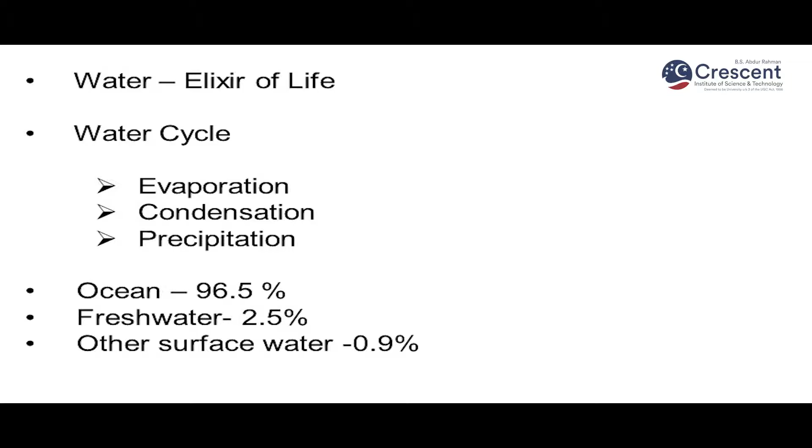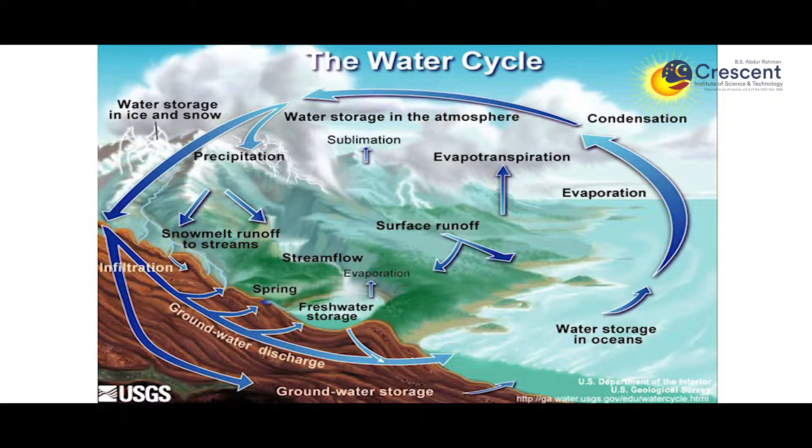Initially, the water from the different sources such as ocean, river and various other lakes and ponds evaporates depending upon the temperature, and further from the evaporation, when it reaches the atmosphere, it condenses and subsequently falls as rain in the form of precipitation. Now we can understand the different types of sources of water on the earth. 96.5% of water is available in the form of oceans, which we cannot directly depend upon as water supply, and we are only left with 3% of water which we are to deal with.

Now this 3% of water is available in the form of different sources. They can be broadly classified under surface sources and underground sources. To quote a few examples for surface sources, it can be a reservoir, river, lake, stream, springs, and the main underground water supply is through the wells.

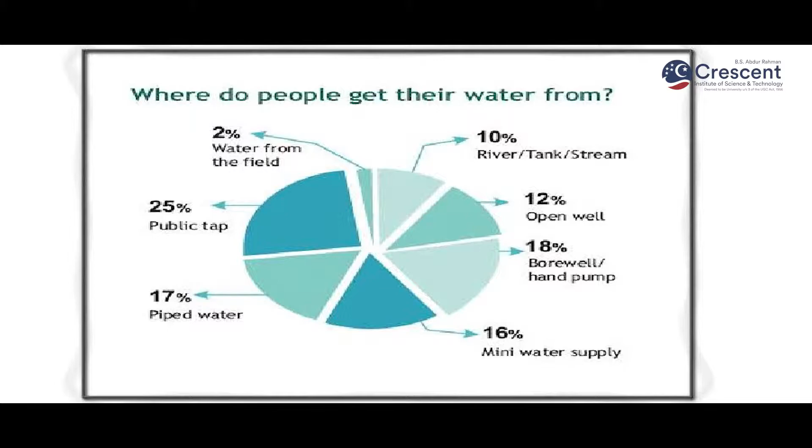Next is, where do people actually get water from? Though there might be a lot of sources, we mainly depend for our water supply on public taps, which is around 25%, followed by bore wells, then piped water, and subsequently open wells and rivers. So these are the different sources people actually get water from.

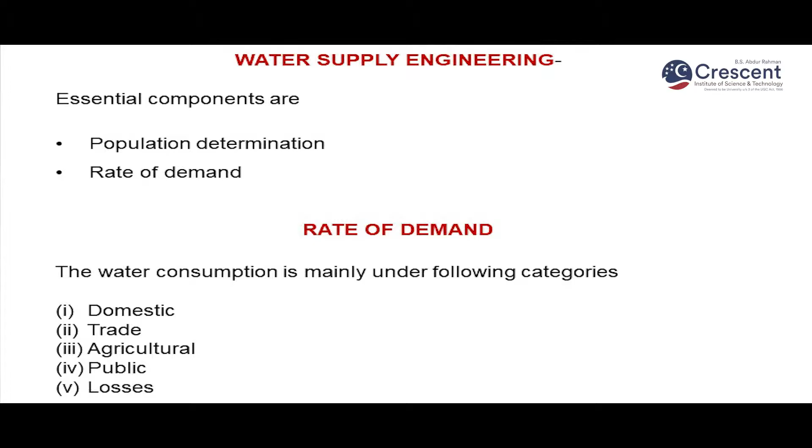Coming on to water supply engineering, the two main essential components involved in water supply engineering are population determination and rate of demand. It is essential to forecast the population correctly and also to have a clear knowledge of the various rates of demand. What is the water demand? Actually, an average consumption by a person varies from 3 to 6 liters per day.

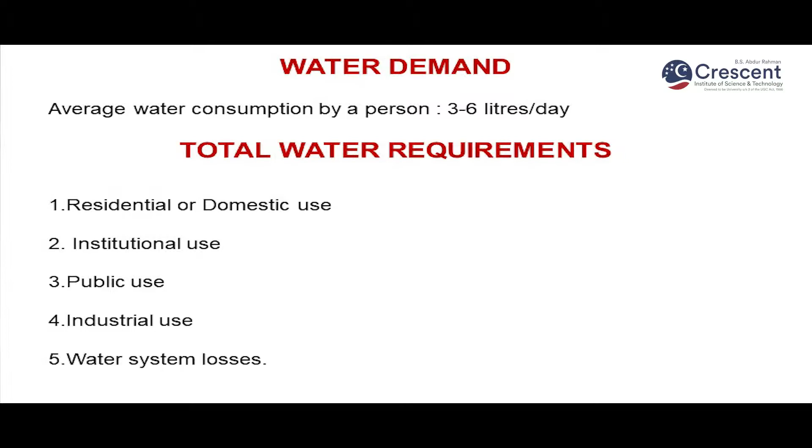The total water requirement which we demand in a day can be broadly classified under various categories. First one is residential or domestic use, then comes institutional use, third is public use, fourth is industrial usage, and fifth one is water system loss. Now let's go one by one. First, coming on to the requirement for residential or domestic use.

As per IS 1172/1957, it recommends a per capita consumption of 135 liters per day. So how does this 135 liters per day come in? It can be broadly divided into various activities such as bathing, which requires around 55 liters per head per day. Usually the amount of water is always quoted as liters per head per day.

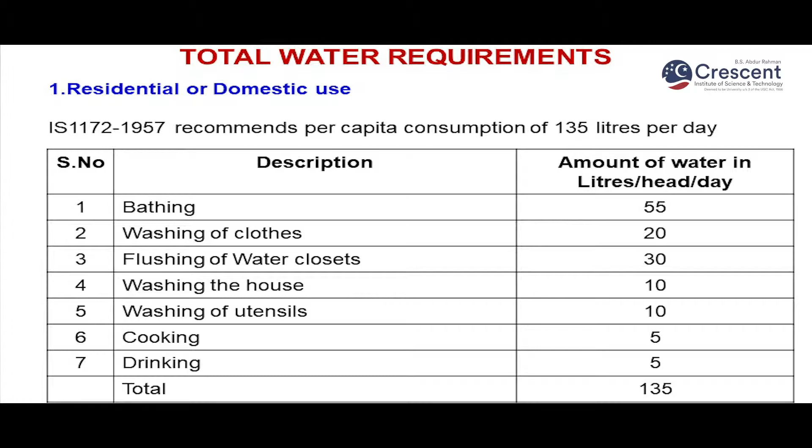Washing of clothes requires 20 liters, flushing of water closets requires 30, washing the house 10, washing of utensils 10 liters, cooking and drinking 5 liters per head per day. So it constitutes around 135 liters per day. Not only humans, even animals require water.

According to the Manual on Water Supply and Treatment prepared by the Ministry of Urban Development, New Delhi, it recommends the following rates. Consumption of water for domestic animals: for cow and buffalo, it varies from 40 to 60 liters per animal per day, for horse it is around 40 to 50, dog 8 to 12, followed by sheep and goat 5 to 10. So this is with respect to the animals.

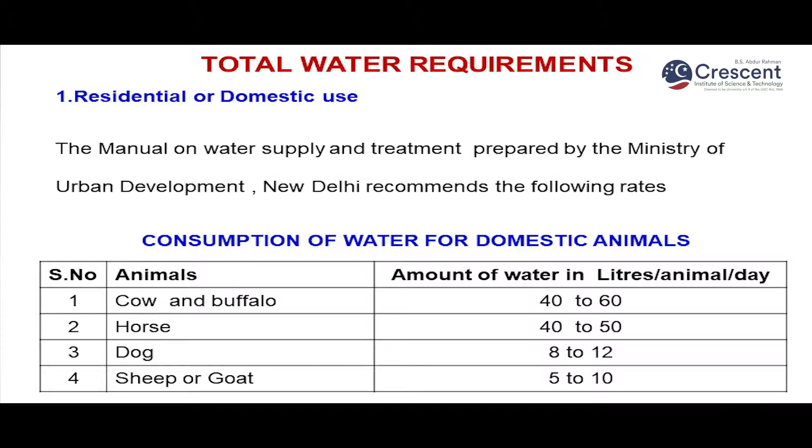Next demand is from institutional use. There are several institutions around us. It can be a hospital, a hotel, a hostel, nursing homes, or boarding schools. So various demands are being exerted by these institutions also.

If you look at the requirement, water requirement is again in liters per head per day. For hospitals, it is around 340 per bed if the number of beds does not exceed 100, and if the number of beds exceeds 100, it rises up to 450 per bed.

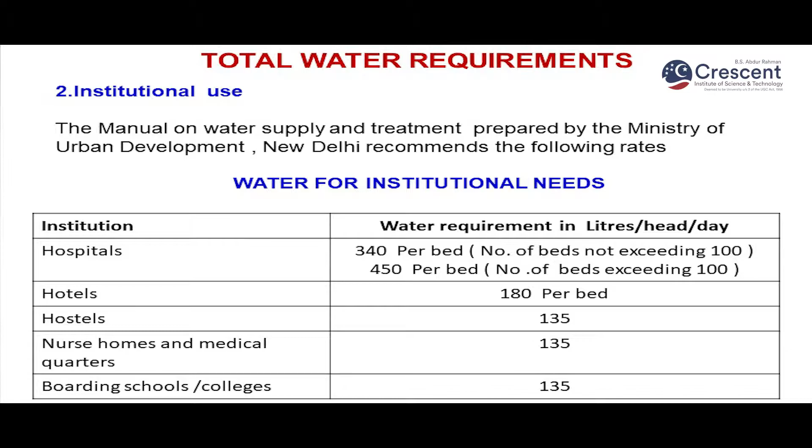Coming on to hotels, it is 180 per bed. Then followed by hostels, it is equivalent to that of the average demand, that is around 135 liters per day. And boarding schools, again 135 liters per day. And apart from that, we have restaurants, airports, seaports, junction stations and intermediate stations, terminal stations. These stations not only include the railways but also the airports and also the bus stations, that require around 70 liters per head per day.

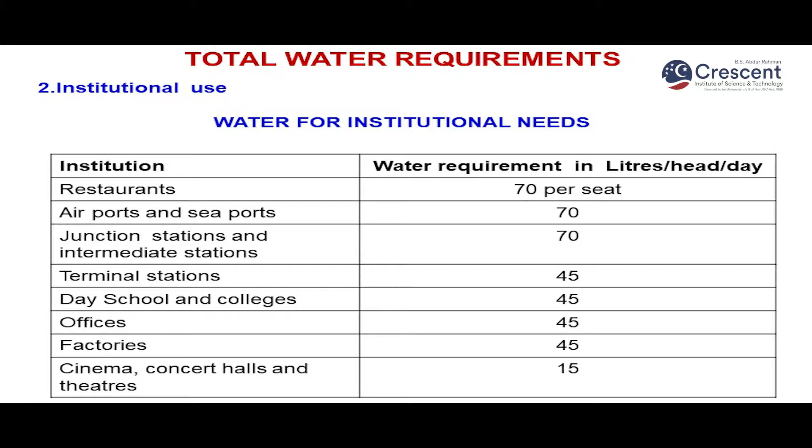In day schools and colleges, around 45 liters. Offices around 45 liters, factories again 45 liters per head per day, and finally cinema, concert halls and theaters around 15 liters per day. So these are the institutional uses.

Coming on to the third major requirement, it is the public use. So for public use, water is required for the following purposes. It can be for road washing, it can be for the sanitation purpose, it can be for the watering of the public parks and for firefighting. So on an average basis, for road washing the consumption is around 5 liters per head per day, and for sanitation it is around 3 to 5 liters per head per day, and public parks again it is based on the per square meter per day.

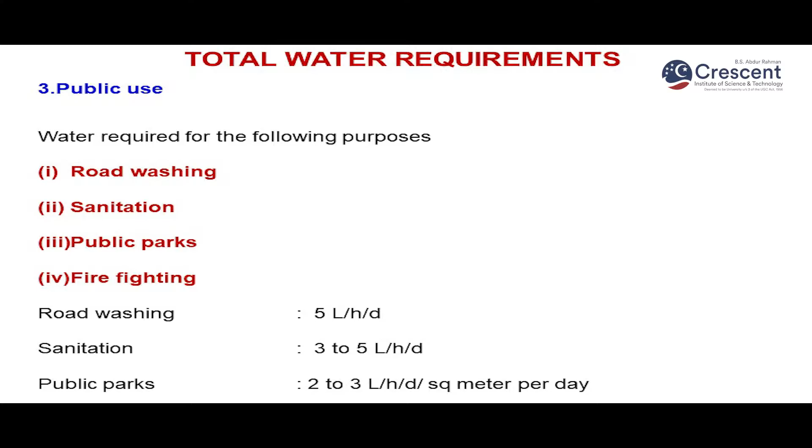Now the major demand in this public use is the fire demand. So fire demand depends upon the population, the congestion and the fire resistance of a particular building. So fire hydrants 15 to 20 centimeters in diameter should be provided on the street corners to fight the fire, and the water pressure that should be available within the fire hydrants should be around 1 to 2 kg per square centimeter in order to fight fire.

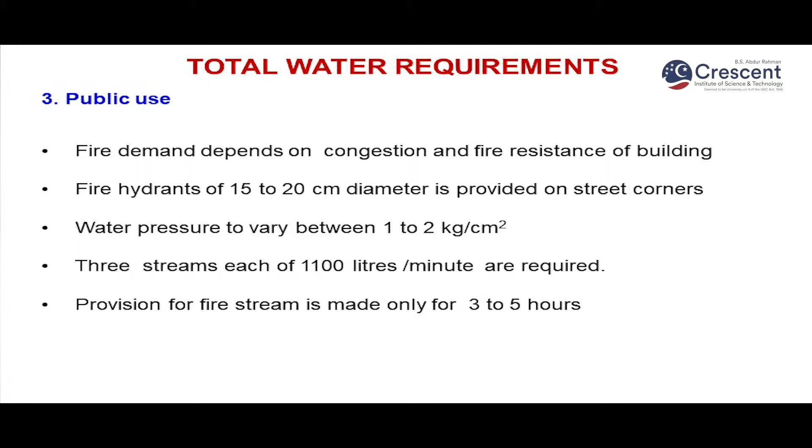The fire has to be fought with at least 3 streams of jet, each carrying a capacity of 1,100 liters per minute, and this has to go on for 3 to 5 hours in order to put down the fire.

Next comes the industrial use. The quantity of water that is required for the industries varies depending upon the process, and it varies from industry to industry and also depending upon the unit of production. Here are a few examples of the industrial needs given in this table. For example, if it is an automobile industry, depending upon the vehicle production, you have 40 kiloliters per unit.

Similarly, for textile industries, for a production of 100 kg, you need around 8 to 14 kiloliters per unit. And again, paper industries, if you can see, per ton of unit production you have around 200 to 400 kiloliters per unit. Again, I'm telling you it depends upon the type of the industry and what is the process that is carried out in the industries.

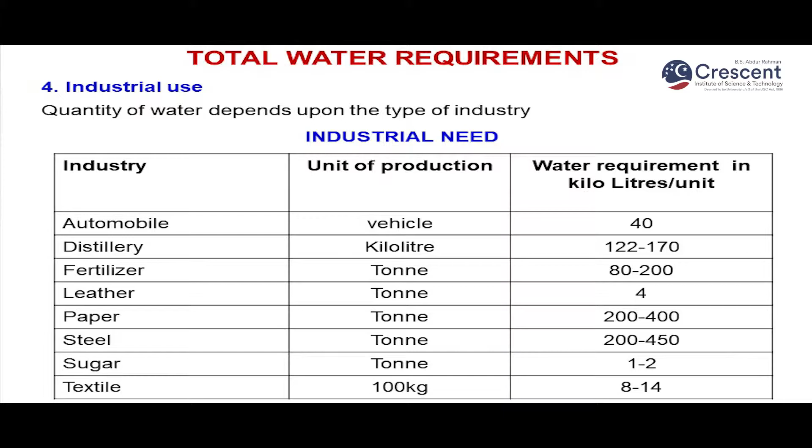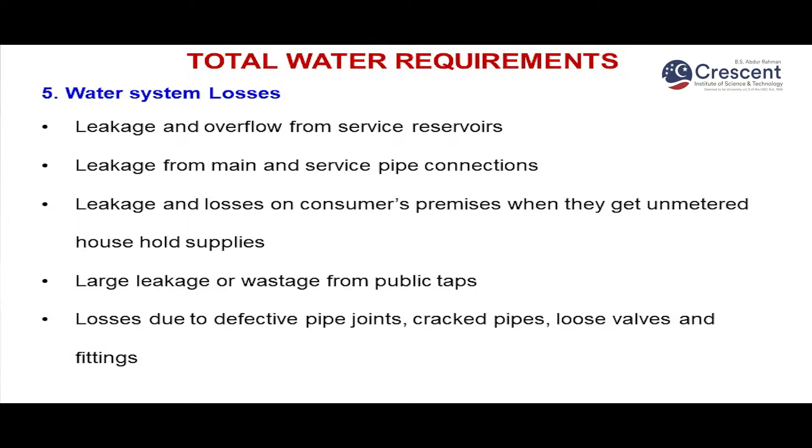And apart from these demands, water is also lost from the systems. So where do all these losses take place and why should we account for them? Usually the losses are because of the leakage and the overflow that happens in the service reservoirs, and there can be leakage in the main and the service pipe connections. You cannot avoid the wastage from the public taps and due to defective joints, cracked pipes, loose valves, etc. So water system losses should also be considered in the total water requirement.

Now coming on to the per capita demand, based on the categories we have previously discussed, which can be domestic use, industrial use, commercial use, public use, waste and thefts, etc., you have a total demand of 335 liters per head per day. So the total yearly water requirement of the city in liters divided by the population per year, taking the design period into account, you call that the per capita demand.

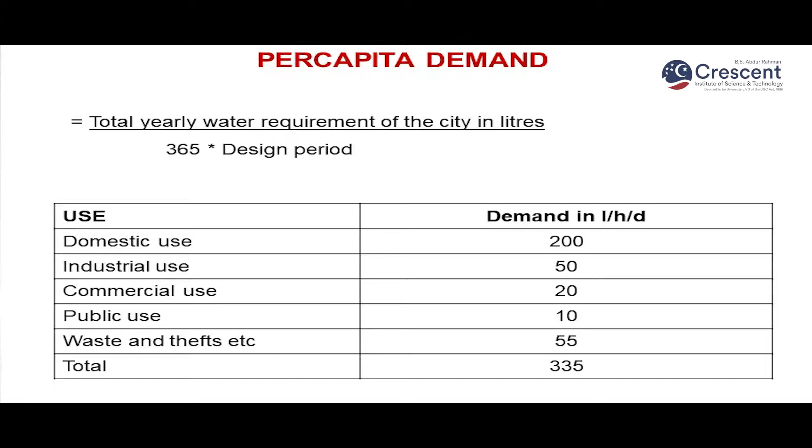Now coming on to the factors that will affect the rate of the demand. So we have discussed about 335 liters. What are the factors that are going to affect these rates? It can be the size and type of the community, standard of living. How is standard of living going to affect it? If you have a very high standard of living, you expect good hygiene and there is consequently a good use of water. Climatic conditions, quality of water.

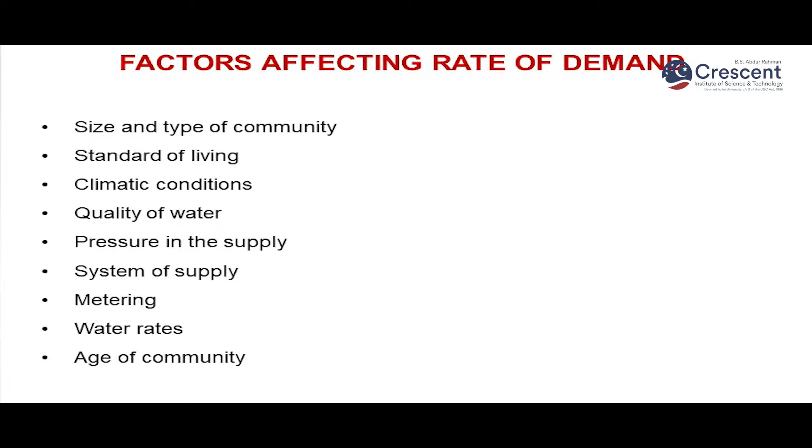If the quality of water is good, we tend to use more water. Pressure in the supply system, system of supply, metering, water rates and age of community. If it is a stable community, then they require much less water when compared to a newly developed community. Then followed by the variation. With the variation in the season, it may vary.

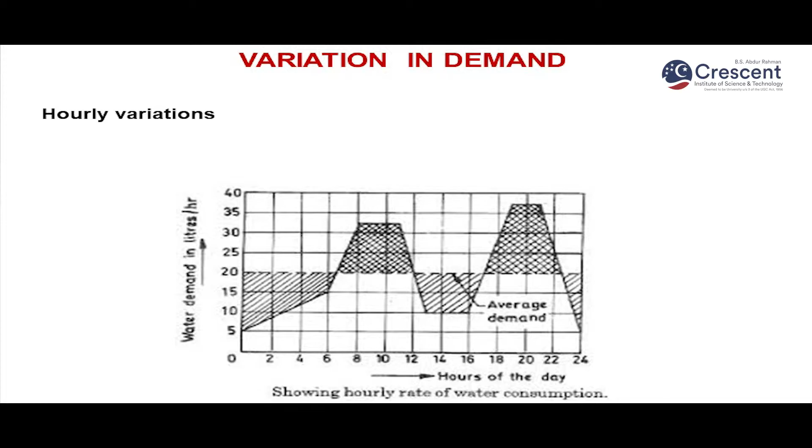So after that, around 12 o'clock again there is a gradual decrease, and in the early night times around 8 o'clock there is again a demand. So this shows the variation on an hourly basis in the requirement of water we take up during the different hours of the day, and 20 liters is the average demand exerted by an individual.

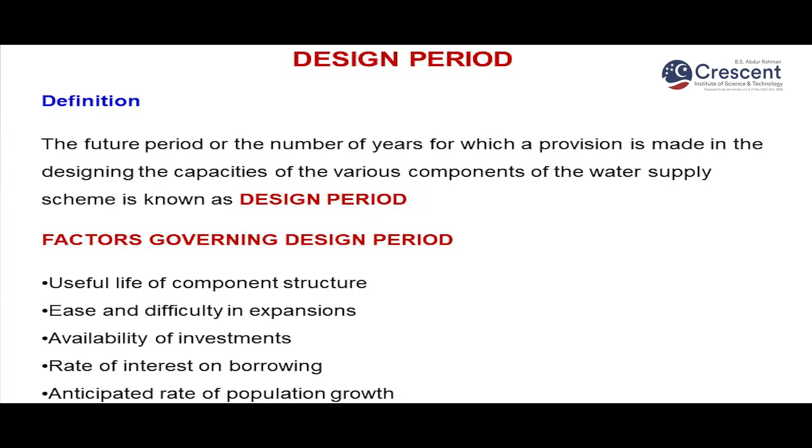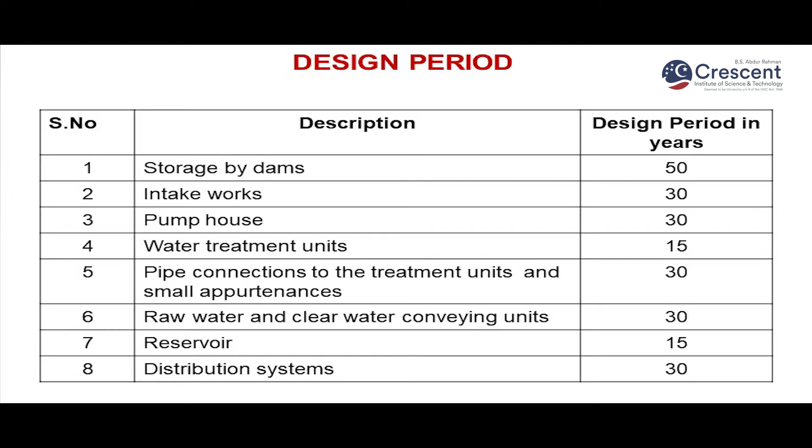And what is the design period in years? For storage by dams, you have to take a design period of 50. Intake works, around 30. Pump houses, 30. Water treatment units should serve the community for a minimum of 15 years. Pipe connections around 30 years, conveying units 30 years, reservoirs 15, and the distribution system should serve around 30 years.

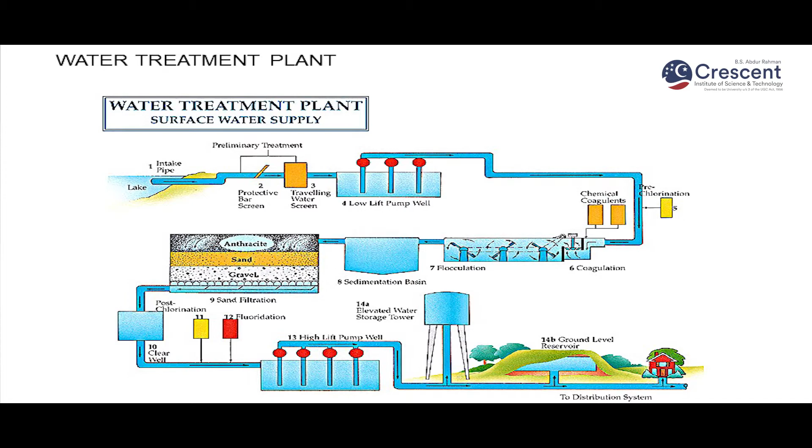The basic mechanism is that when water is subjected to sand filtration, it undergoes mechanical straining. There can be some sedimentation through the sand, and the suspended particles and impurities are removed. From sand filtration, the water is taken to the chlorination unit, where chlorine is added. This ensures the water is safe until it reaches us. Chlorination is one form of disinfection employed in water treatment. From the chlorination unit, the water is taken to the elevated storage facility and subsequently distributed to the city by gravity.